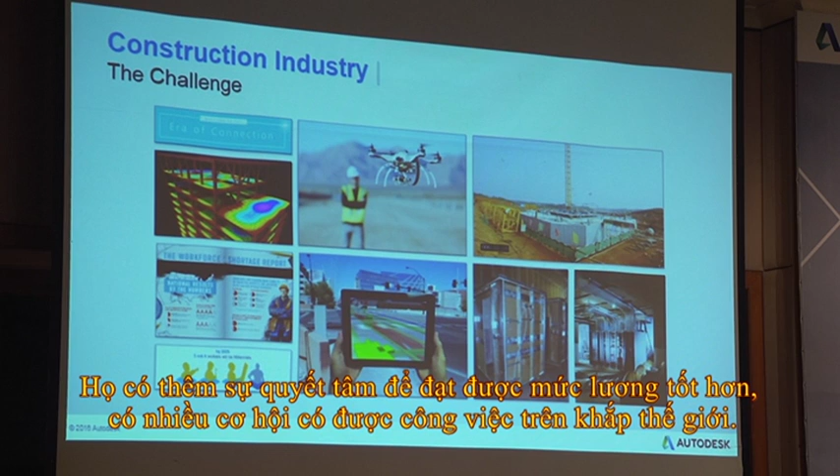BIM is a big boom in the market, and those who have Revit capabilities have more intentions to get a better salary and more job opportunities around the world. Some countries also start talking about prefabrication, moving ahead with design, analysis, construction, and moving BIM to prefab or modular construction. The next thing is cloud-based systems, like BIM 360 or A360. Internet connection is very important nowadays - even just now while waiting for the seminar to start, people were browsing and asking for the Wi-Fi password.

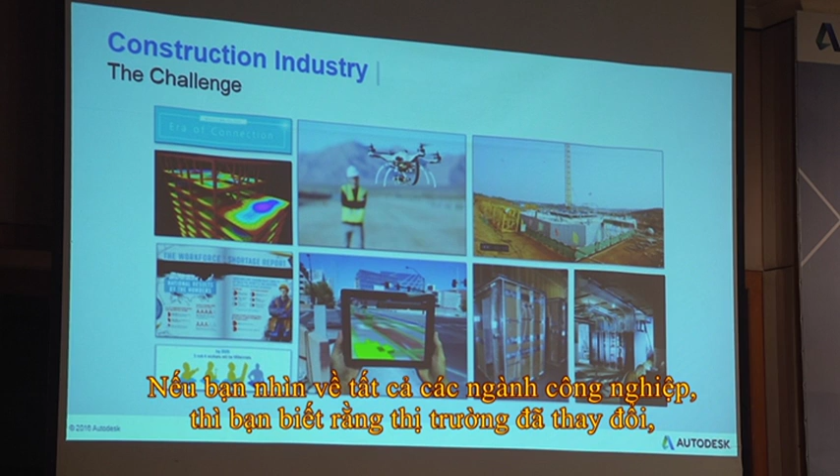If you look at all this industry challenge and trend, you know the market is changing, the world is changing, the construction industry is changing as well. So what we're looking at differently today is people, process, tools, and data - these four things are quite connected to each other. We need a process for each construction project, and we have identified BIM as the process.

But how about the resources or the people? Do we have enough people to do the job? Do we have the draftsman that knows Revit? Do we have architects or structural engineers who know Revit? How about the owner - do they know what BIM is? What do they expect about BIM?

So when people talk about BIM, they start to talk about data. Right now, especially on big projects, the owner starts asking about the data - they want to know what kind of data you can give them for their facility management, construction management, and so on.

When we talk about all these things, tools is one of the major important roles that's played. Revit is just one of the tools available in the market for the BIM process. In fact, if you browse the internet, you can see there are thousands of types of BIM tools in the market. So all these things are quite connected.

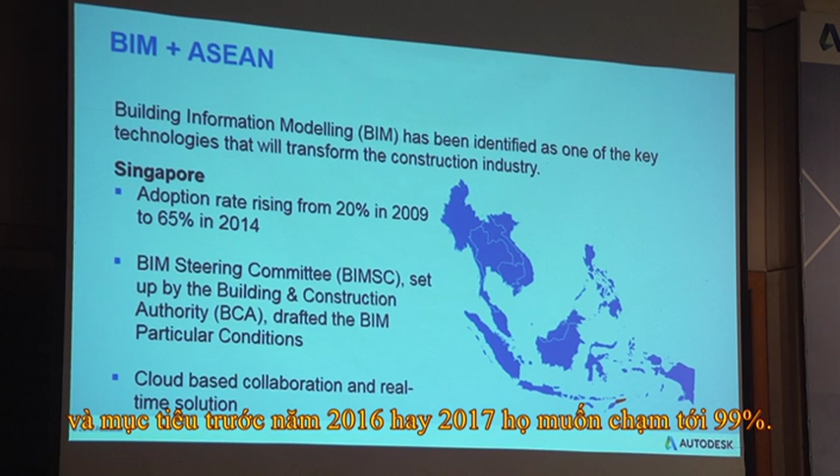They aimed for 2014 to already have 65% adoption levels throughout the whole construction industry, and they're targeting by 2016 or 2017 to hit 99%. There's a lot of initiative being done by the government agency, especially the BCA.

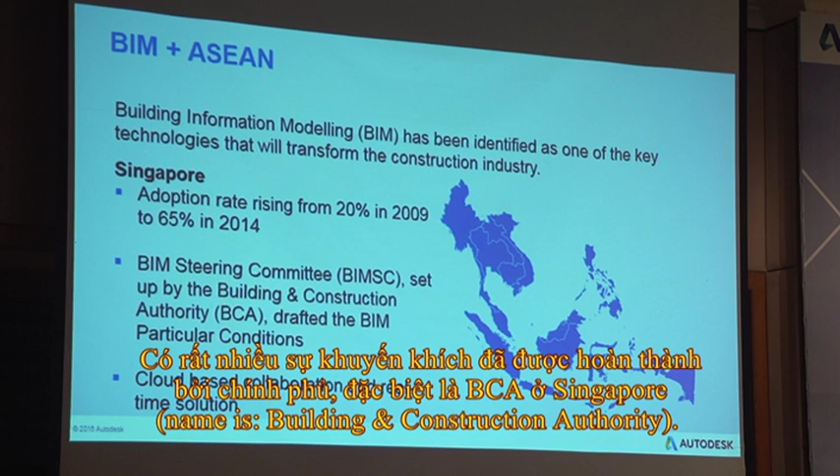In Singapore, they call it the Building and Construction Authority. They are the agency quite involved in BIM, and they are the ones supposed to draft the BIM guide and manage the BIM adoption and initiatives in Singapore. Until 2014, basically everyone in Singapore was talking about the BIM process - how they're going to carry the BIM data or model from pre-construction, from the design stage, up to the construction stage.

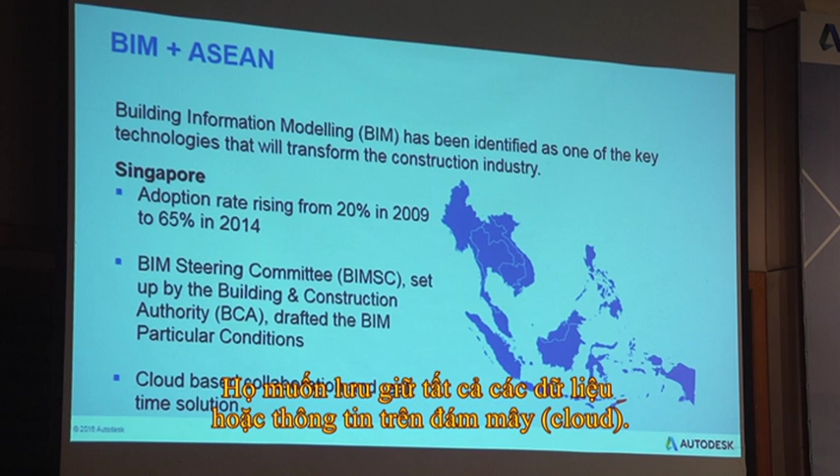What is quite interesting in Singapore is starting beginning this year in 2016, they start to talk about cloud-based collaborations. That means they start to talk about hosting all the data information in the cloud. So that is one of the hot topics happening in Singapore right now. They're talking about digital construction, digital analysis, and so on. I'll share more details on what kind of tools or solutions the Singapore government is looking into.

Okay, the next thing is Malaysia. Despite any story about Malaysia politics, the BIM adoption or BIM initiative has been chaired by the Public Works Department, or what we call JKR or PWD in Malaysia. They introduced BIM to the market in 2007.

But unfortunately, if you look at the BIM adoption in Malaysia, it's very low at the moment. The rate is only about 5 to 10% in the whole construction industry. But what we see recently, beginning last year to this year, the adoption has been significantly increasing year by year.

That's just because we realize that in reality in Malaysia, the BIM initiative is not driven by the government, it's driven by the user or by the owner itself. So building owners or developers start to ask about the BIM data or BIM models from the consultants. Because of that, the whole market starts to talk about and discuss the BIM adoption, the BIM implementation, the BIM process for certain projects for the owners and also for the developers.

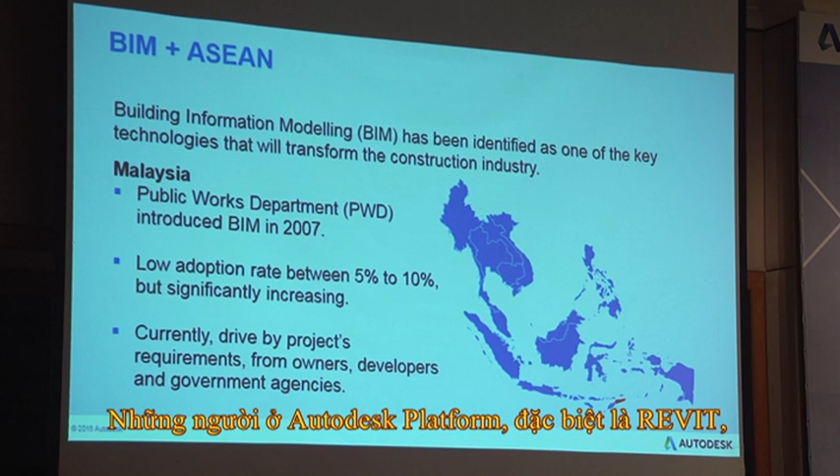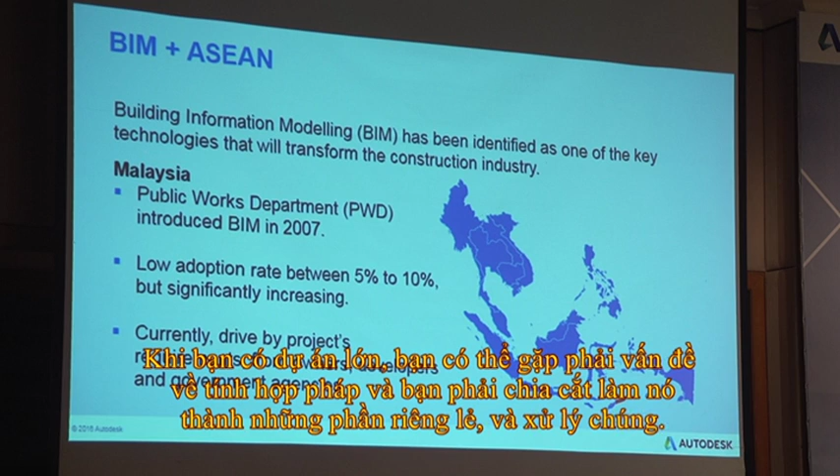So those on the Autodesk platform, especially Revit, will realize that one of the major issues is when you want to deal with big projects or mega projects. When you have a big project, you have a tendency to face lagging issues, so you have to break all the models into separate parts and do it as a link or a work set. We did a few enhancements in terms of that on Revit 2017.

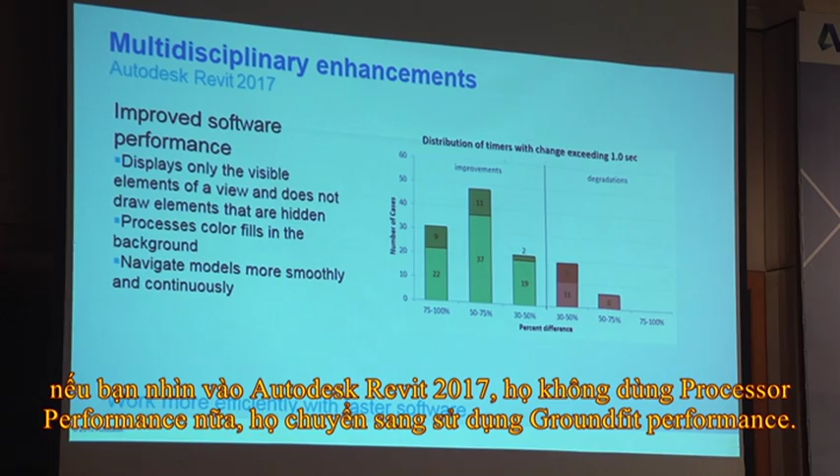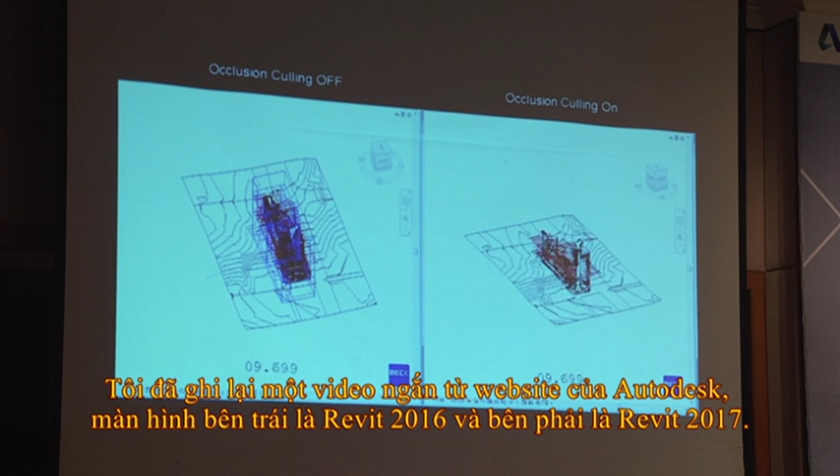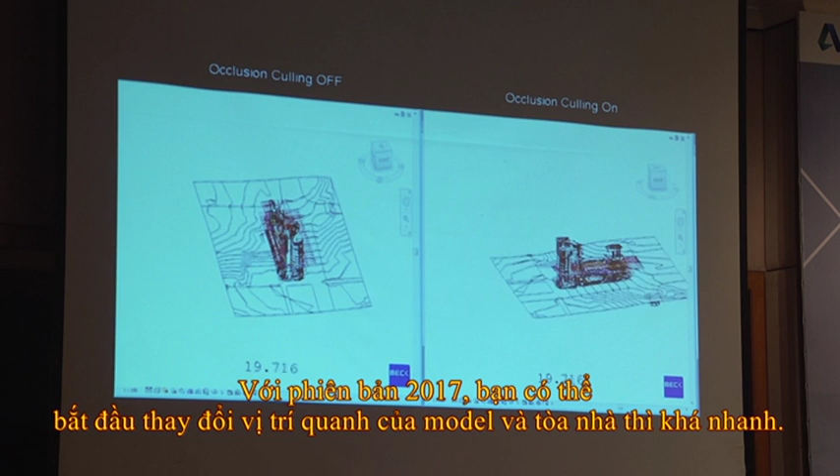If you look at Revit 2017 right now, we are not using processor performance anymore. We start to move the software to use graphic performance instead. I did a quick video screenshot from the Autodesk website. From the left screen you're looking at is Revit 2016, and the right screen is Revit 2017. So whenever you deal with a big project, with Revit 2017 you can start to move around the models, and the building is quite faster when you want to rotate, pan, zoom in, zoom out, and so on.

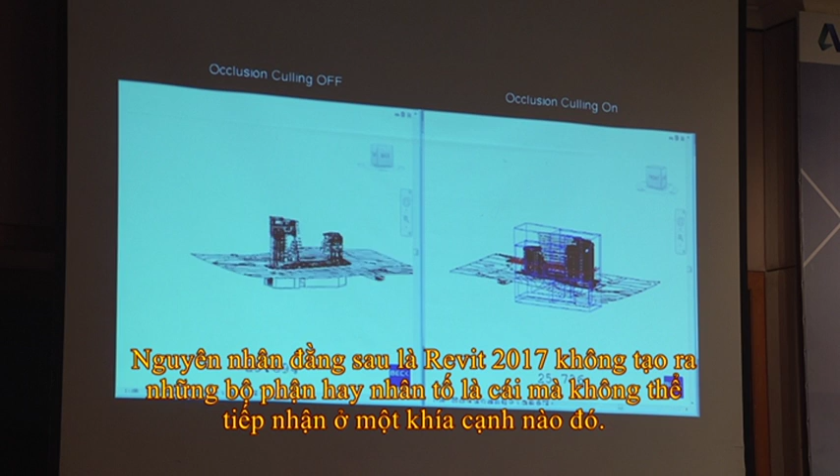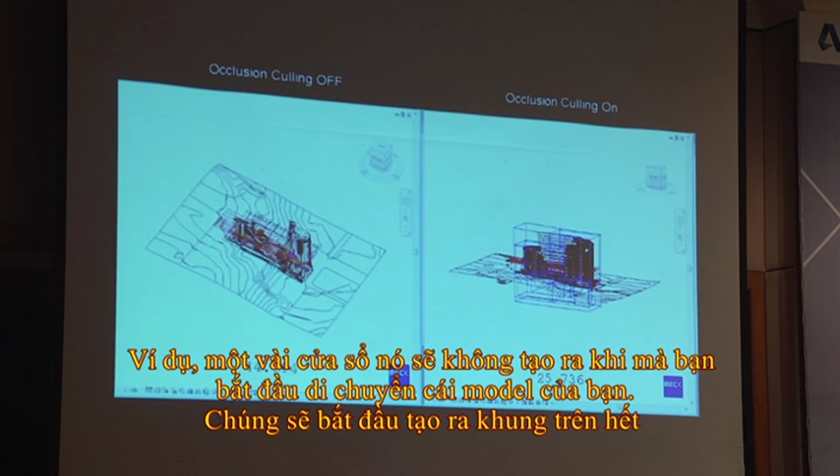The reason behind this is Revit 2017 will not generate any component or element that is not visible to that particular view. For example, any interior doors, interior windows, or interior walls will not generate whenever you start to move your models. They will start to generate just the skeleton instead.

Before I continue, I just want to ask the audience: how many of you are starting to use Revit 2017? Any one of you? Okay, there are a few over here. The rest are still on 2016, 15, 16. So most of you are still on 2015, 2016, right? Is there anyone still using Revit 8.1 or 9.1? I hope not. The reason is because I started to learn Revit since Revit 8.1, and I've seen a lot of change since then.

So when we talk about complex projects, big projects, and so on, we realize there are certain limitations on Revit that quite limit the users in terms of their designs, their performance, and also their working flow.

In Revit, we have another add-on called Dynamo. I'm not going to talk in details on Dynamo because we're going to have an expert on Dynamo who will talk about it and other solutions with you guys in the second part of the presentation. But in general, Dynamo is a visual graphic, visual programming tool.

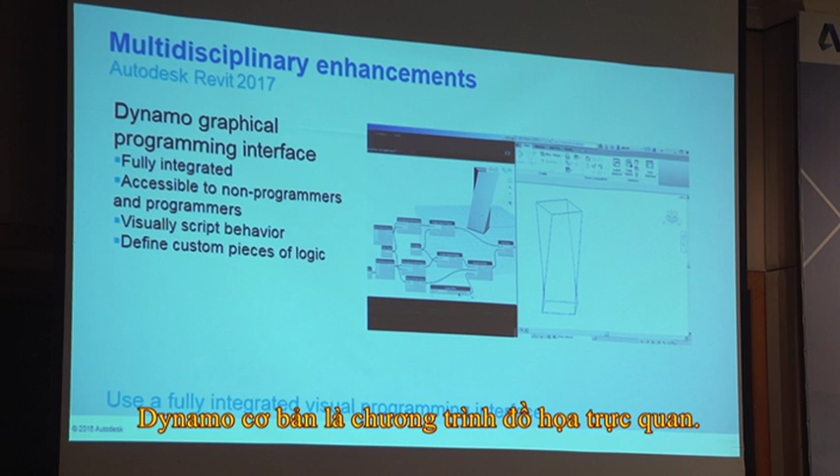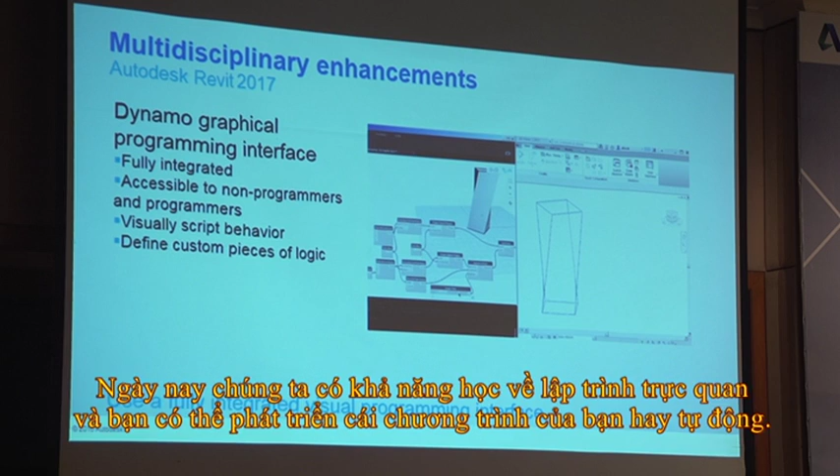That means previously, any programmer starting to write programs on top of Revit, like the API, plugins, and so on, now has the capability to learn visual programming and start to develop their own programs or automation. In short, I call Dynamo an automation tool.

Whatever you require to develop in Revit manually, you can automate that process with Dynamo, okay? So later on, in the second part, Angwin is going to show you how he uses Dynamo in some of his projects or proof of concept projects.

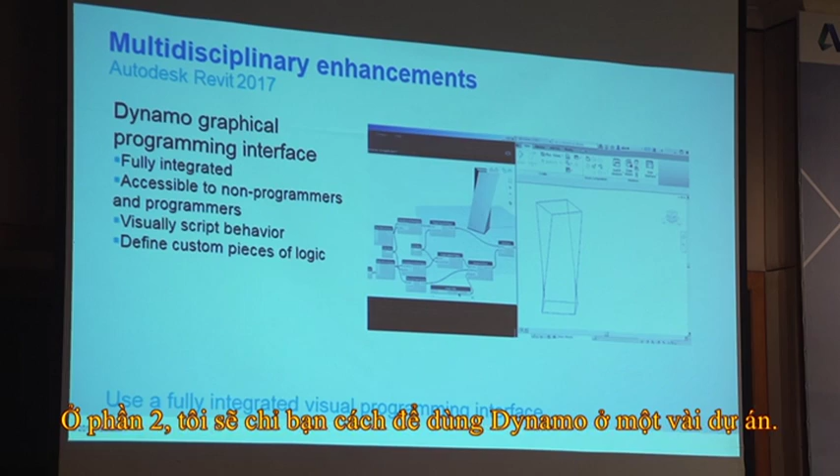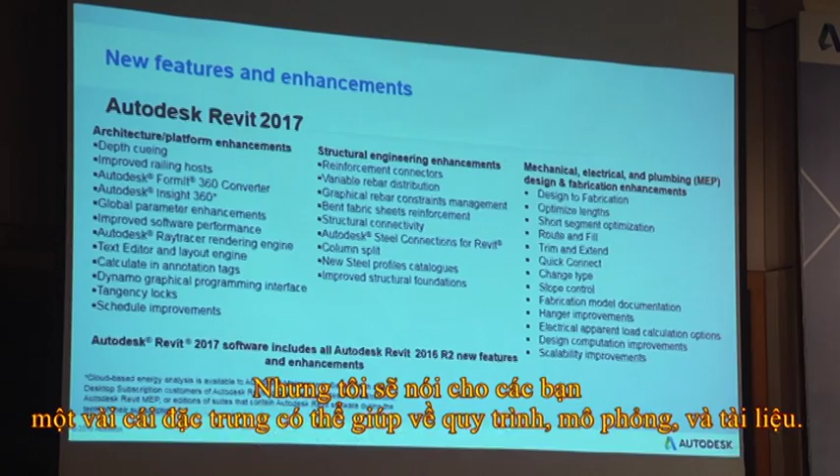Okay, so I'm going to touch a little bit on Revit 2017. I'm not going to cover all the features, but I'll show you some features that might help with your process, your modeling, and also documentation. So I'm going to do a live presentation on Revit 2017. If you look at the interface, everything is going to be the same.

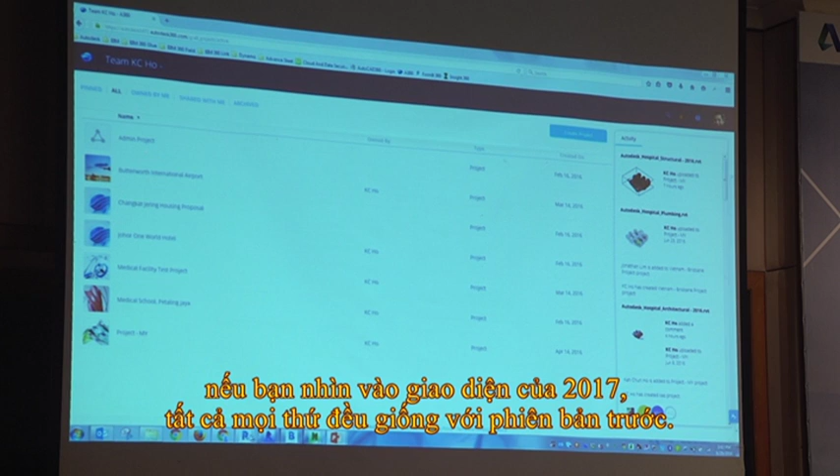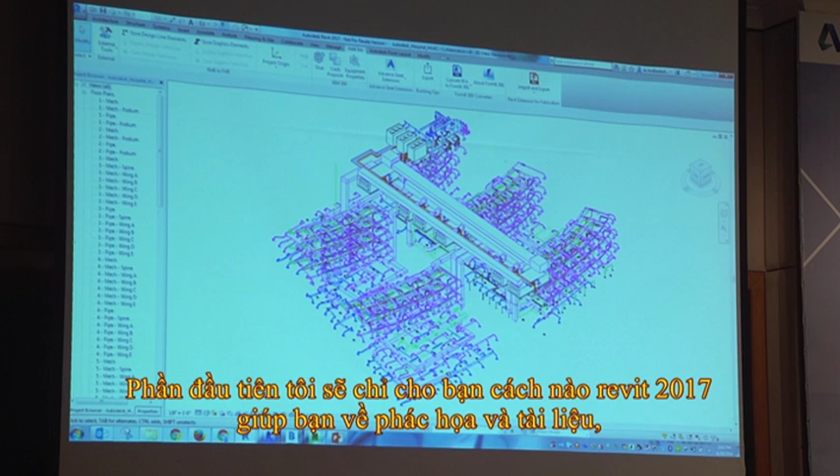All right, okay, so I'm going to split this into 4 parts of the presentation. The first part, I'm going to show you how Revit is going to help you in terms of the... okay, let me see if I have it here. Yeah, okay, I'm going to show you how Revit 2017 helps with drafting and also documentation.

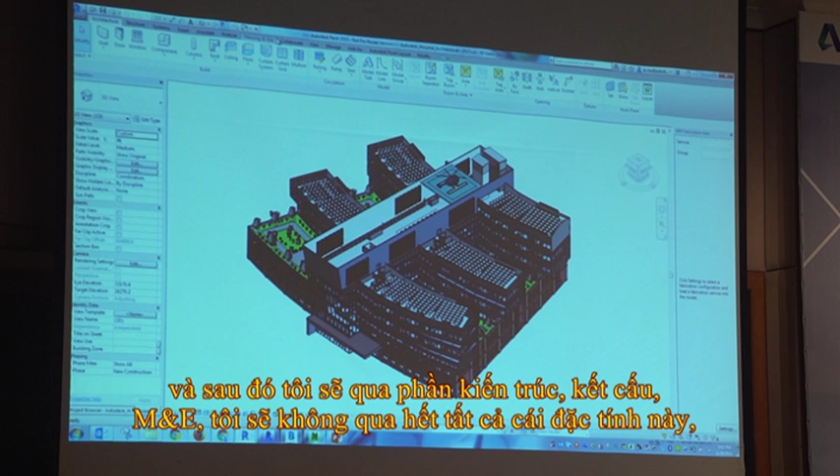Then I'm going to move into the architecture part, structure, and also M&E or MEP. I'm not going to touch all the features, but I'll just touch a little on the key features that might help you or that you might be interested in.

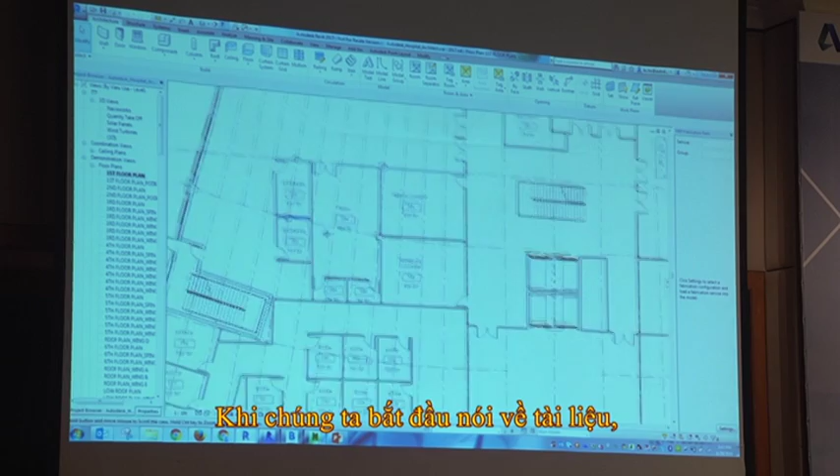Okay, so when we start to talk about documentation, one thing that's quite important is when your architects or engineers start to ask you to make amendments. For example, let's say I have a couple of doors here, and the return wall lap for each door is quite different.

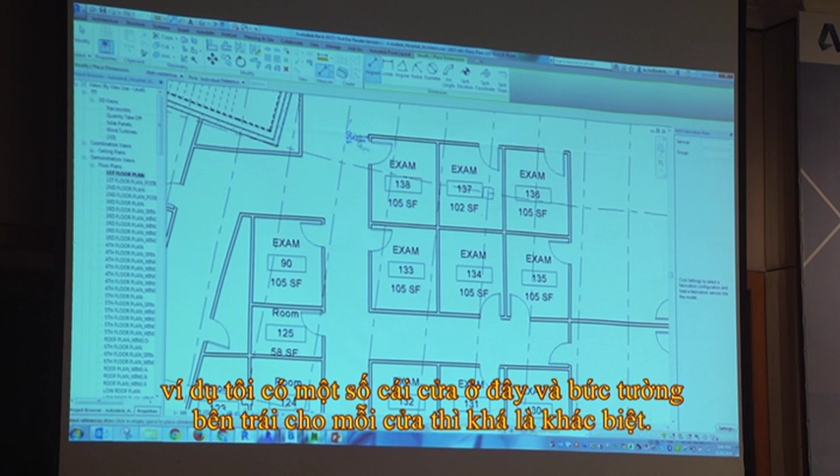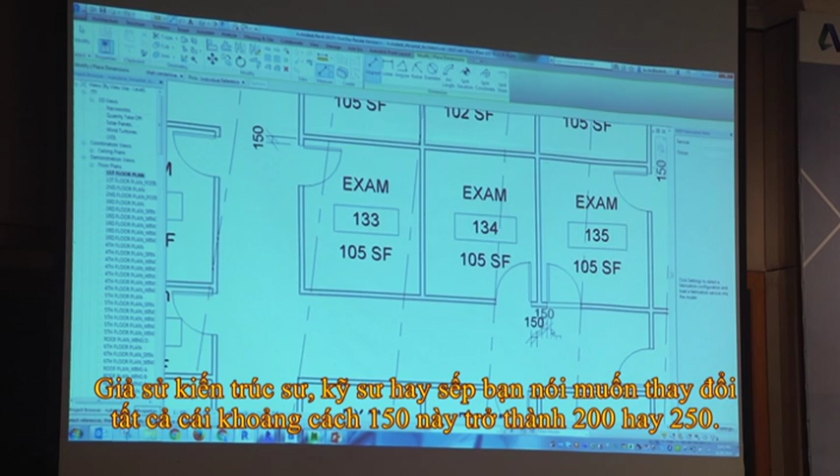Okay, so previously, if you want to do this kind of adjustment, let's say I have it at 150 over here. Let's say the architect or engineer or even your boss says, hey, I want all this 150 return wall lap to become 200 or 250. What you're going to do next is click one by one and start changing the dimension, right?

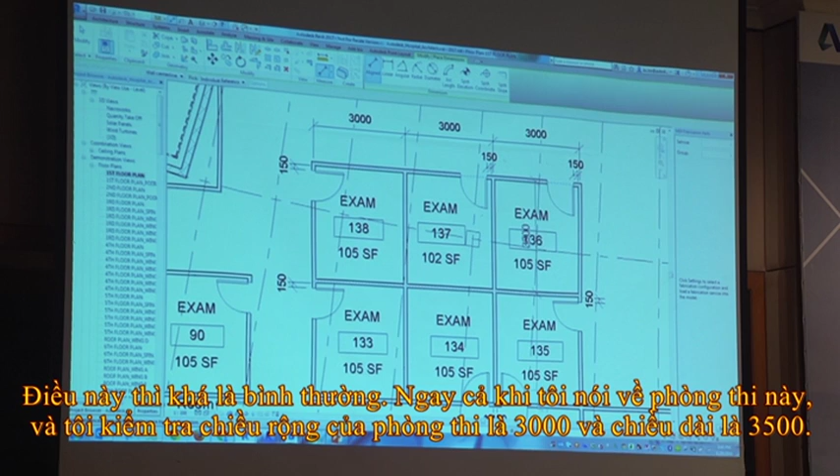Okay, so that's quite normal when you talk about dimensioning and so on. So even when I talk about this exam room, let's say I have this exam room and I check the dimension is 3000, okay, so the width and depth is 3000 by 3500, the room size.

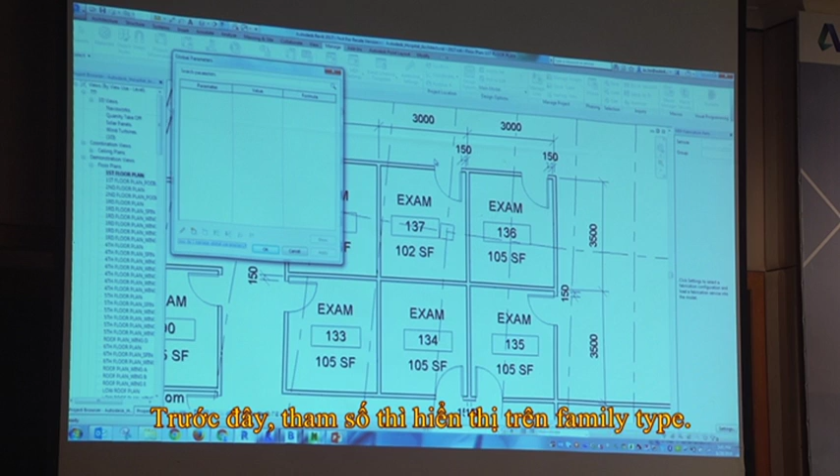Okay, so if I want these changes done automatically the moment I change the dimension, what we can do is use what we call global parameters, okay? I'm going to delete all these parameters and show you from the beginning how to create global parameters. Previously, parameters were only available in the family type, okay? So have you guys ever created your own families and played around with instance parameters, type parameters, shared parameters, all those kinds of parameters?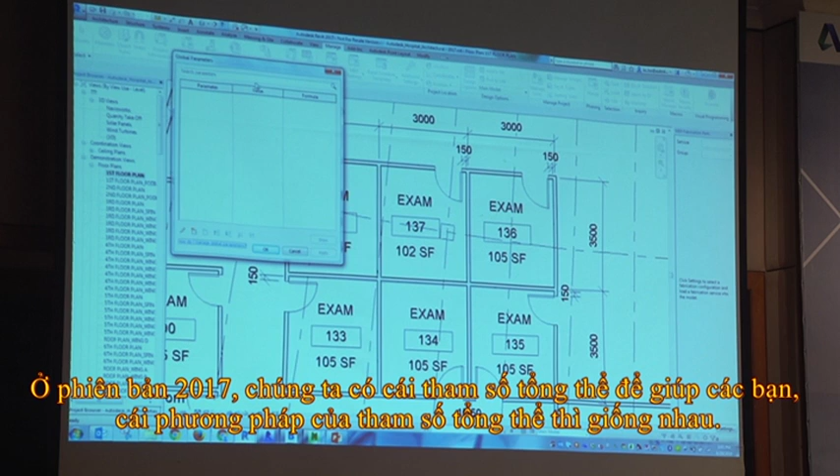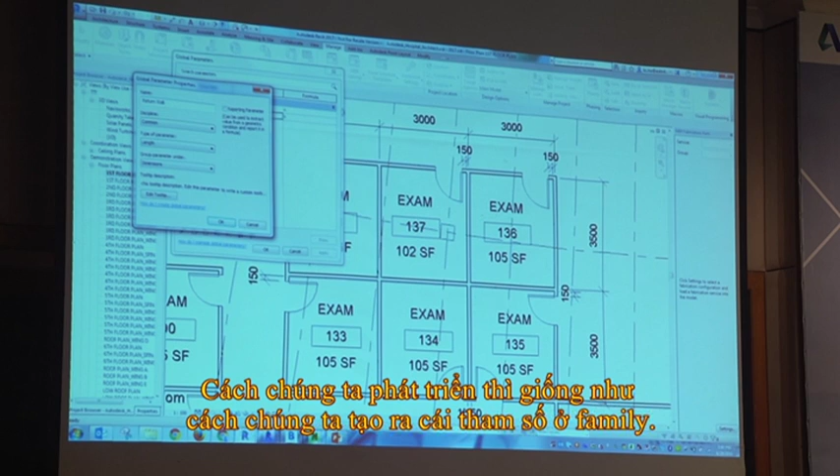So in Revit 2017, we have what we call global parameters. Global parameters are there to help you - the method is almost the same. Let's say I'm going to call this exam room width, okay, and I'm going to create another one called exam room depth, okay. So how we develop this is almost the same as how we create a parameter in the family, okay.

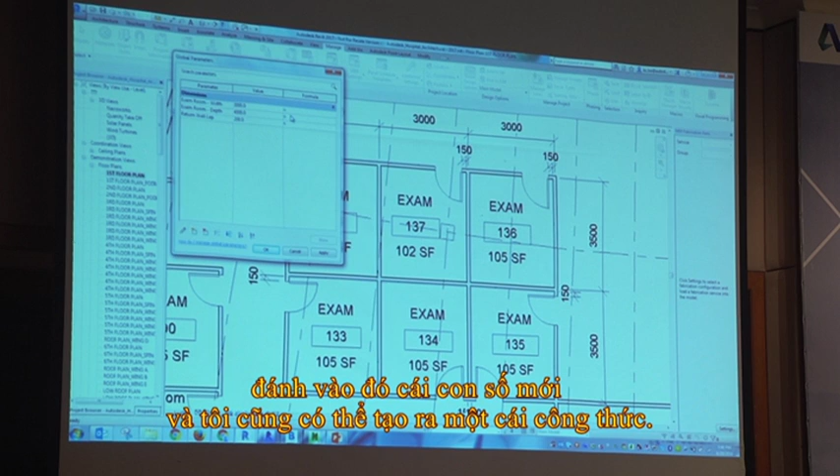So basically what I'm going to do is set width, depth, height and so on. I can even pre-key in the dimensioning here, and I can even create a formula as well. Let's say I want it so that every time the depth increases, the width adds by 50 or 100. Basically, I can do this kind of thing.

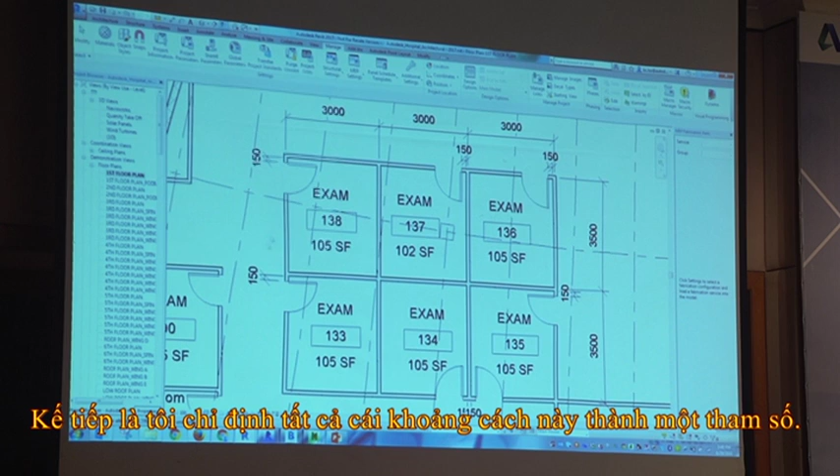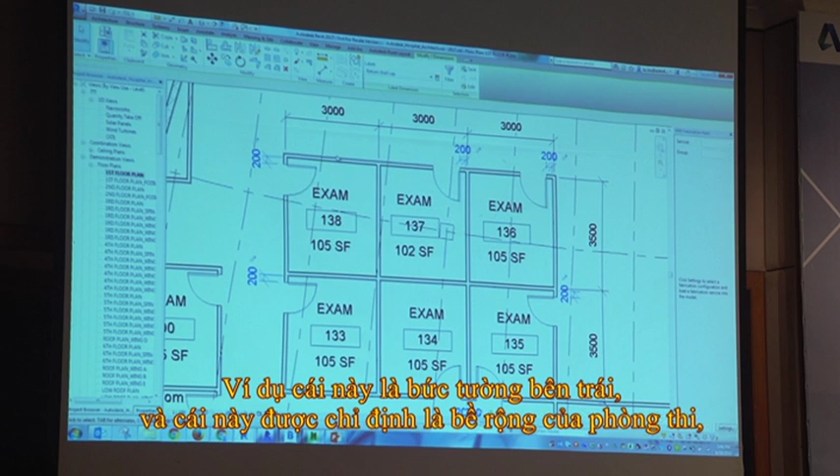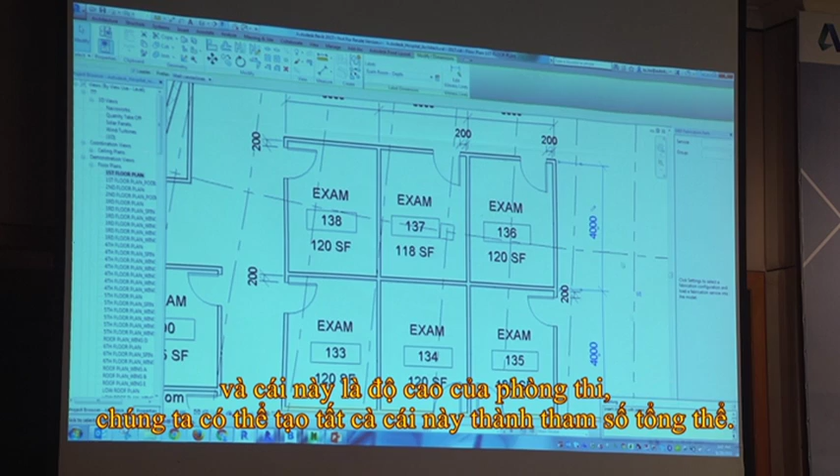All right, so what I'm going to do next is assign each dimension to a parameter. Okay, so for example, this one is the return wall lap, and I can assign this as my exam room width, and this one as the exam room depth. Okay, I have a little conflict here, so I'll just ignore it. All right, so we can create all these global parameters, and when we start...